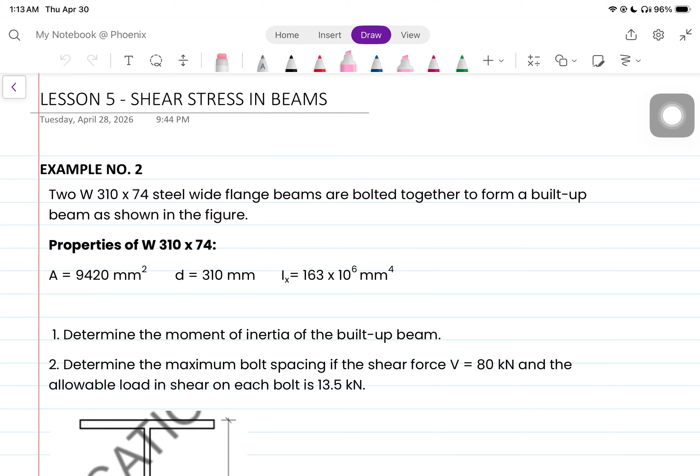Let us proceed now to example number 2 under the shear stress in beams. Two W310 by 74 steel wide flange beams are bolted together to form a built-up beam as shown in the figure. Given are the properties of the W310 by 74, which are the area, depth, and the moment of inertia.

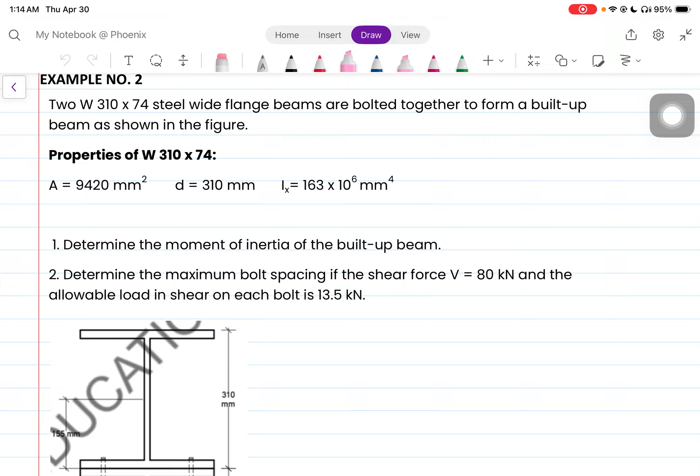First, determine the moment of inertia of the built-up beam. Second is to determine the maximum bolt spacing if the shear force V is equal to 80 kN and the allowable load in shear on each bolt is 13.5 kN. Okay, so let us solve now.

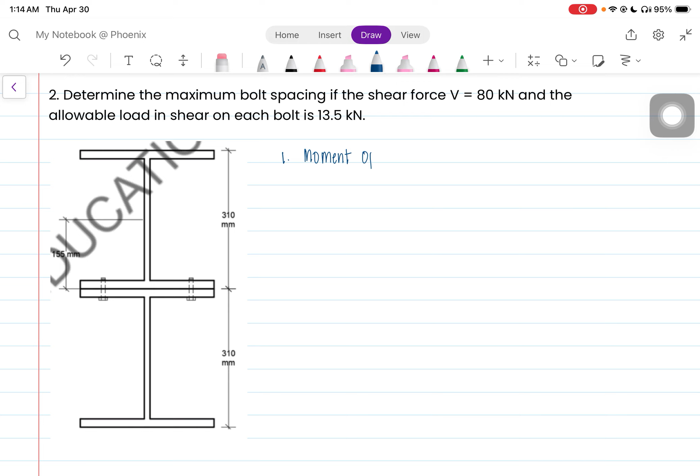Ang unang tinatanong sa atin is the moment of inertia of the built-up beam. Kung papansinin natin, pinagpatong lang na dalawang wide flange. So for our moment of inertia, ano yung formula natin dito? Ang formula lang naman natin dyan is to use IGX is equal to the summation of IX plus AD squared.

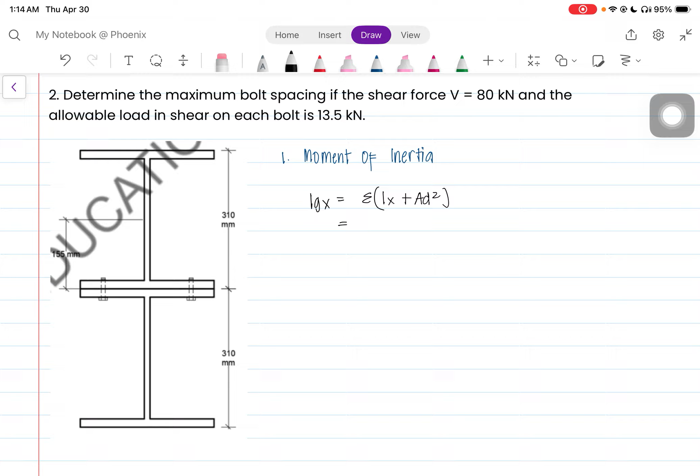Okay, IX, sa taas muna tayo. Ano yung IX natin? That is 163 times 10 raised to 6 mm to the fourth. And then plus natin, ano yung area? Given sa atin is 9,420 mm squared. At ano yung magiging D?

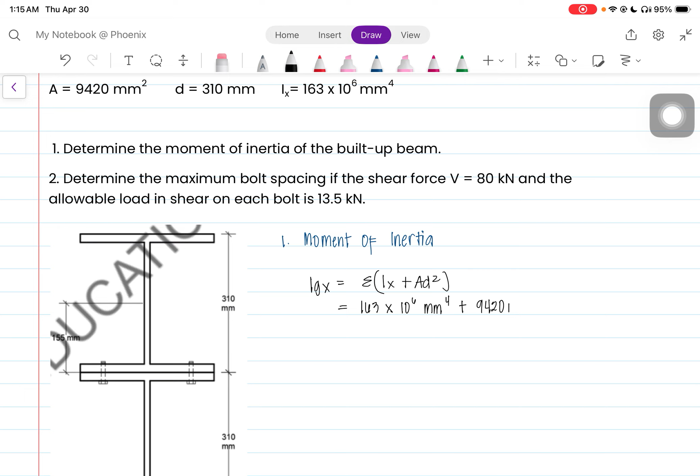Syempre, kung titignan natin, since this is just two wide flange, saan malolocate yung kanyang neutral axis? The neutral axis is located din sa gitna niya. Kahit anong kuhanin natin dyan, gamitin natin yung Varignon's theorem, yun lang din makukuha natin. So if this is your neutral axis for your built-up section, asan yung neutral axis naman pagdating doon sa center of the wide flange? Nasa gitna lang din siya.

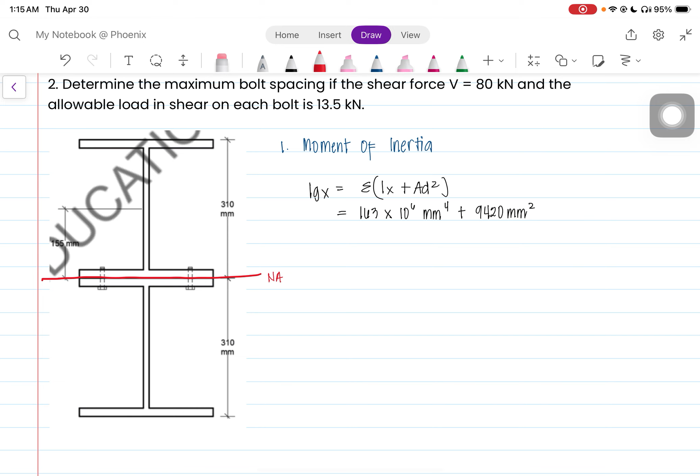Wala na tayong problema kasi given na rin sa atin yung naging center niya, which is 155 mm. So ibig sabihin, our D will be equal to 155 mm, and square. Okay, ngayon doon naman tayo sa pangalawa.

Eh di ba same lang naman sila? So gawin na lang natin is to multiply it by 2. So makukuha natin ngayon, value ni IGX is just equal to 778.631 times 10 raised to 6 mm to the fourth, and that is now your final answer.

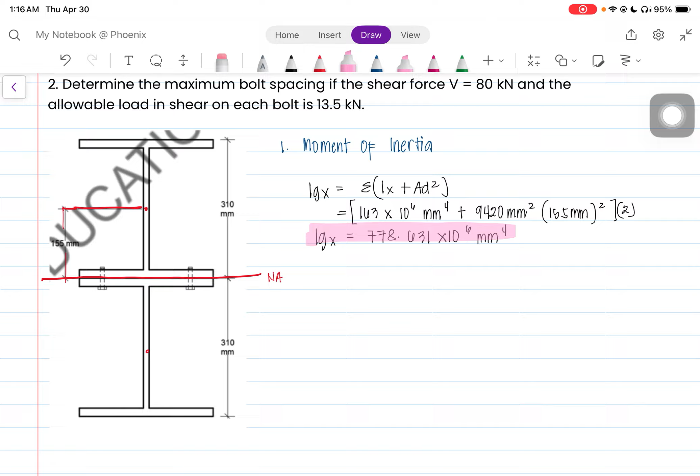Ma'am, bakit hindi natin kuhanan si IGY? Kasi si IGY actually, hindi naman din natin magagamit. At di ba times 2 lang naman siya kasi wala ka namang magiging D.

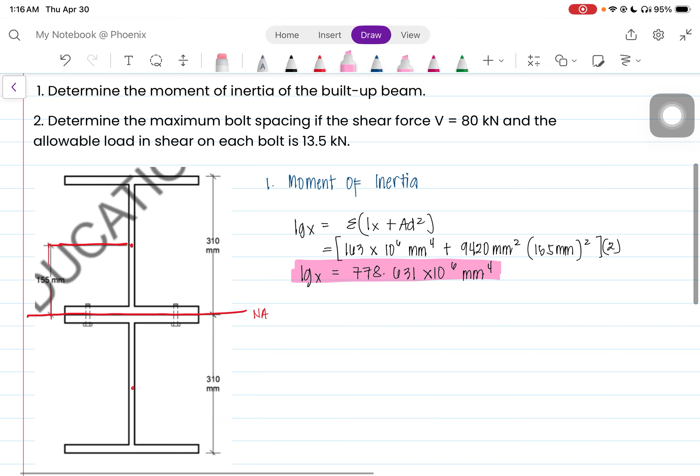Next natin is, we are asked to solve for the bolt spacing. So for our bolt spacing, ano ba yung formula ni bolt spacing? That is, S is equal to Ri over VQ. May R na ba tayo?

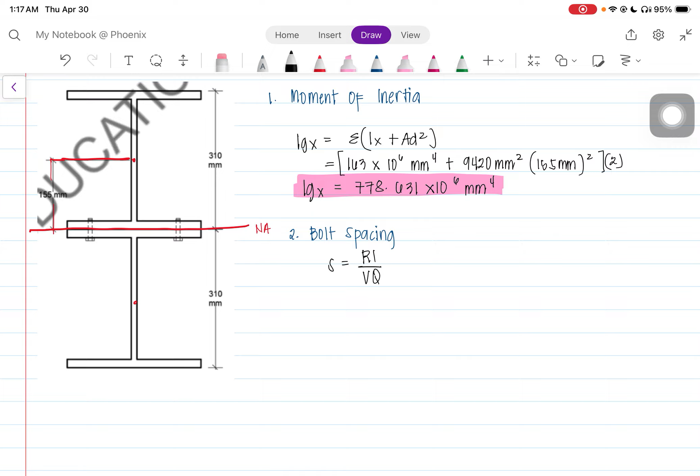Okay, balikan natin yung situation. Ang sabi sa atin, the allowable load in shear on each bolt is 13.5 kilonewton. Eh di ba sabi natin that R is the shear force to be resisted of the bolt. So ibig sabihin, yun na yun.

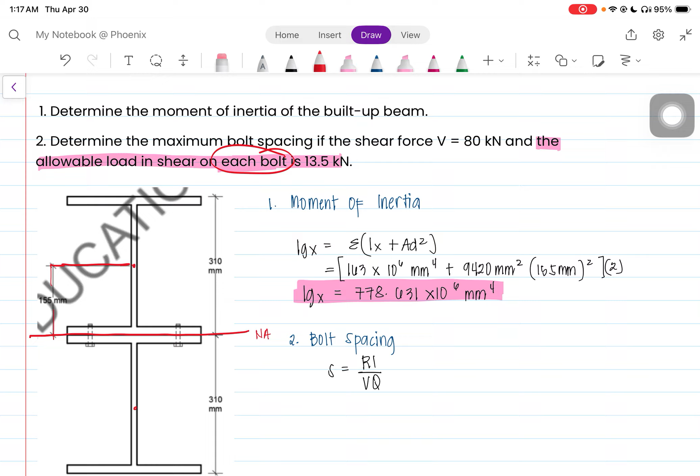But take note, each bolt, pang-isa pa lang yan. Eh ilan ba bolts natin? We have 2. So ibig sabihin pala, R is equal to dalawang piraso daw ng 13.5 kilonewton, and that is equal to 27 kilonewton. Very good, okay, so meron na tayong R.

What about naman si Q? Eh di ba si Q daw ay, that is just equal to the summation of AY. But take note, again, that is just upper or lower part of the neutral axis. So kung isa lang, sa taas lang tayo, kuhanin natin yung area ng ating wide flange, that is 9,420.

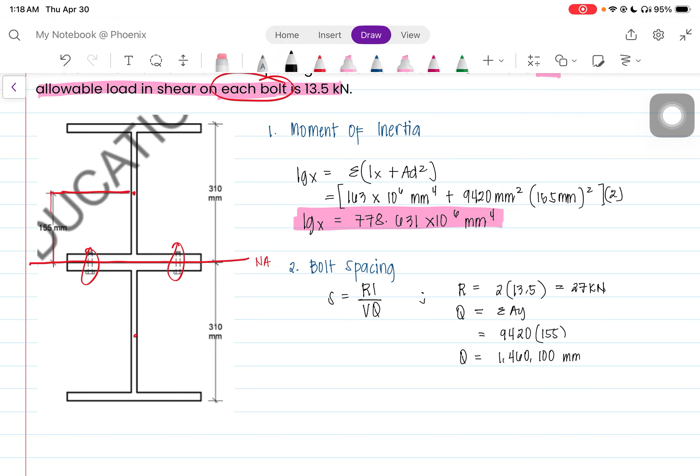At ano yung y niya? Again, that is 155. Syempre, isa lang, hindi natin times 2 na yan, kasi kailangan lang natin is above or below the neutral axis. And the value of Q here now will be equal to 1,460,100 mm cubed. So with that, let us now proceed in solving for the spacing.

So sabi natin, R is equal to 27 kilonewton, no need na i-multiply pa kay times 10 raised to 3, wag na natin convert kay Newton. Then ang I natin, again, ang I natin will be syempre yung built up na. Ito naman na, gagamitin natin yung nakuha natin, that is 778.631 times 10 raised to 6 mm to the fourth.

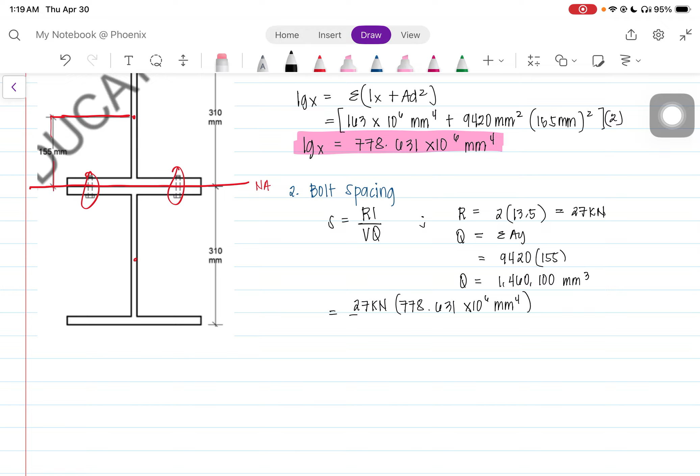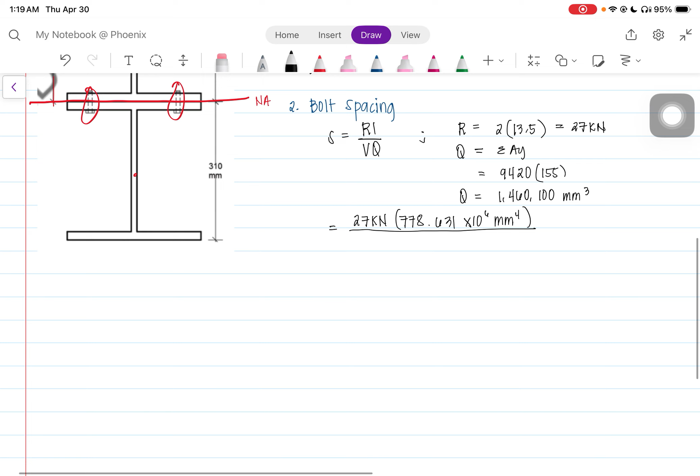Then we divide it by, ano si V? Given si V, di ba, sabi sa atin that shear force V is equal to 80 kilonewton. And ano naman si Q? Yung nakuha natin na 1,460,100 mm cube. So kung titingnan natin, yung ating mga units, meron tayong kilonewton sa taas, kilonewton sa baba.

We have mm to the fourth sa taas, mm cube naman, so bawasan lang natin ng tatlo na sa taas, ang matitira is in mm. So solving this, the value of spacing will be equal to 179.979 mm. But take note that we are talking about the bolt spacing.

And in this case, the bolt spacing should be round down, round down to the nearest tens. Siya na nang malayo kapag hundreds tayo. So if this is the case, then S is approximately 170 mm. Okay, and this is now your final answer.